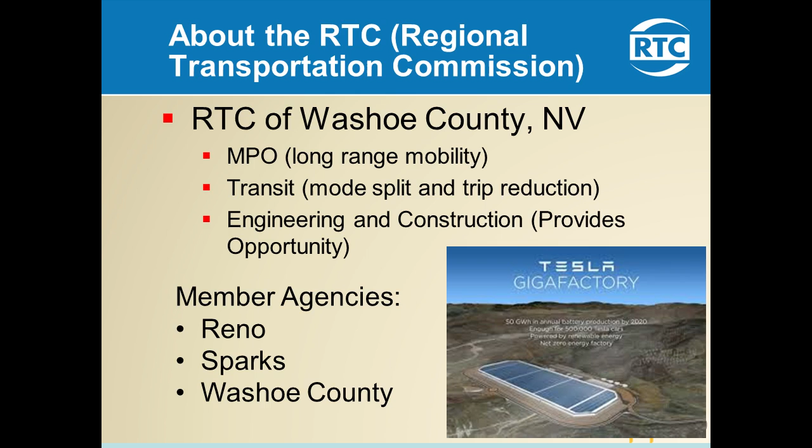We're also unusual, or were unusual. In 2002, our voters not once but twice voted by initiative to index our fuel tax to inflation to pay for road and pavement improvements. I'm happy to see that a lot of the states have finally broken down and their legislatures have also been passing fuel tax increases, because our federal friends, Congress, that's just such a non-starter to provide sufficient funding for our roadway improvements.

But for us it's kind of interesting. The first time we did it, we indexed it to the consumer price index, which was flat during the early 2000s while construction inflation was going through the roof. Most recently, we indexed it to the producer price index, which more closely parallels construction inflation, which keeps our funding levels adequate.

We not only index our local county fuel tax, we index the state tax, which hasn't been raised for 20 years or so, and we keep that chunk. We index the federal fuel tax, and we keep that, which hasn't been raised since 1993 and has about 30% of its buying power. We also index the federal diesel fuel tax for all the diesel sold in our county, which hasn't been raised since 1982, and is the reason we have to build roads 5 feet thick on our interstates. We keep that as well.

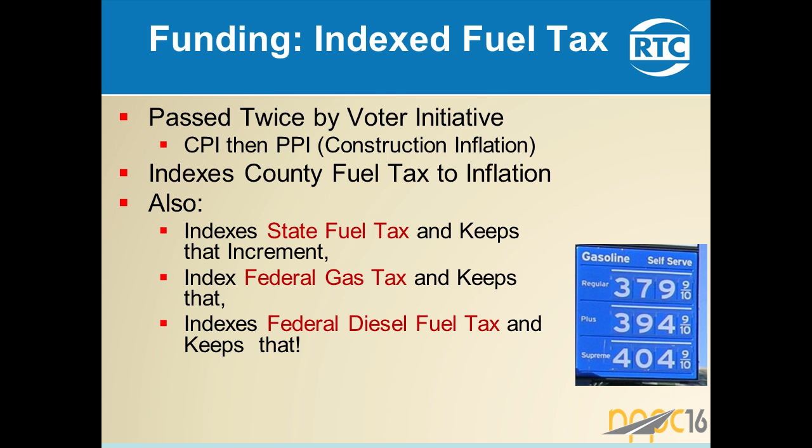So we're very fortunate in that we have a sufficient funding stream as well.

70% are local residential roads that each of our cities have, and they have a tax increment that takes care of that. When you look at the trips that occur, about 42% of the trips in our community are on those 2 interstates, about 50% are on our network, and about 8% of the trips are on those local roads. Although lots of people like to say every trip starts on a local road, so that's a concern for us as well.

On our pavement preservation program, when we developed this system, I'll also say I'm in a very fortunate position in that I don't own any of these roads. They all belong to the communities, and their maintenance departments are responsible for the regular conventional maintenance. So I don't really have any assets, but I manage this tax increment, we hire the consultants that reconstruct these roadways and oversee the construction in-house ourselves, and then turn them over to our local agencies.

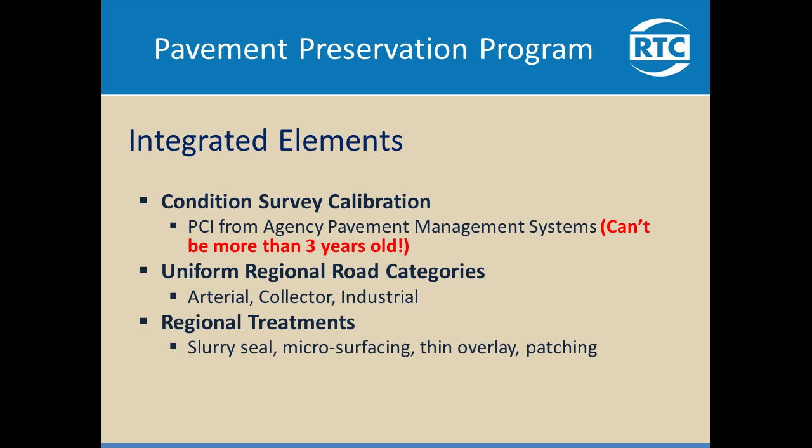We all had to come to an agreement on what the regional road categories were and what treatments each of our agencies were comfortable with having placed on their streets. Our tools were slurry seals and microsurfacing, thin overlays, and patching - pretty conventional stuff.

In terms of distributing and prioritizing what work happens, roads with a PCI less than 50 are eligible for rehabilitation and reconstruction, and then we rank those by ADT. Ones with the higher traffic get the first priority in terms of getting funded, and you keep going down that list until you run out of money.

If the first road was in the city of Reno and they had sewer work or something, that meant they couldn't do that road that year, and the next road was in the city of Sparks, the money would go to the city of Sparks, for example. So again, being blind to jurisdiction.

The title of this presentation was Decision Making Based on Data, and so I'm going to go through a lot of the data sources that we acquire here.

We rank the rehab at different levels, and then preventive maintenance - most of our roads, our network, is in good to very good condition, so we're kind of in preventive maintenance mode. To qualify for that, it's 56 to 100 PCI, and structural distress less than 5%.

Then we have a corrective category that's kind of a catch-all, because there's some lower ADT roads that may never be captured, so we set aside a certain percentage of funding for those, so we can get them in the package and fill in those gaps between the rehab reconstructs and the preventive maintenance stuff.

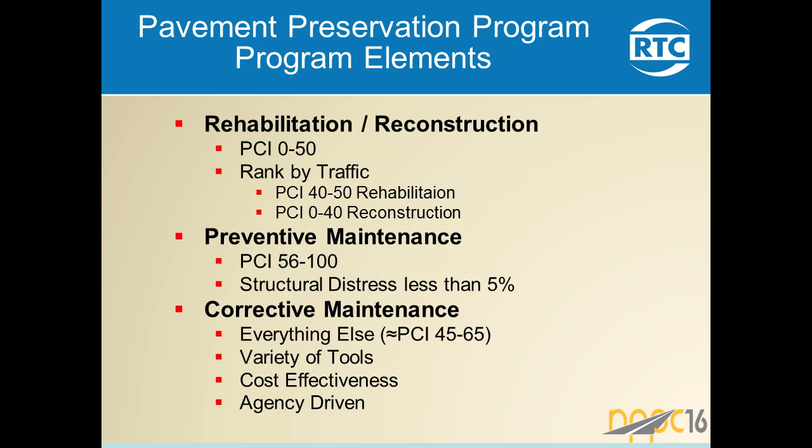In terms of decisions that need to be made, because we're the MPO, we have to have good data on the long range, from our long-range transportation plan, and we work with our planning agencies to figure out what our long-range growth needs are going to be, what kind of capacity improvements we're going to have, and then we look at our pavement infrastructure to see what our demands are going to be for funding needs in the future.

That's kind of how we came up with that, and it drove our success in passing those fuel tax initiatives, because our long-range needs were $4 to $5 billion over the 30-year planning horizon that we developed for our long-range transportation plan. Those costs come directly out of our pavement management system and how we do this stuff.

Our current program of projects, as I said, we use that to prioritize things. We also use this data for continuous improvements, looking at the performance of these things and figuring out how to do it better, faster, and more cost effectively.

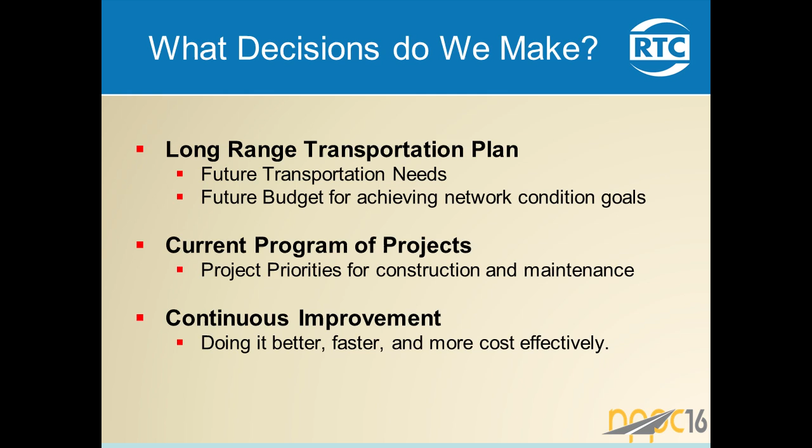In terms of data sources, we have a lot of old experienced engineers with a lot of institutional knowledge, and we take full advantage of them. We also have the pavement management data from the pavement management systems and PCI. And then we have an ongoing research contract, two of them actually, with our local university, the University of Nevada at Reno, which is home to the Western Regional Superpave Center.

We have a $150,000 biannual contract for pavement research. They also have a traffic engineering department, and we use them for getting data on managing capacity and traffic signal optimization and those types of things.

We also use national studies and participate in organizations like the National Pavement Preservation Partnerships and TRB, and try to implement that kind of data. And then we also do a lot of public outreach and use what our community feels.

We listen a lot to our community and take seriously their perceptions of what they want our community to look like long range as we grow.

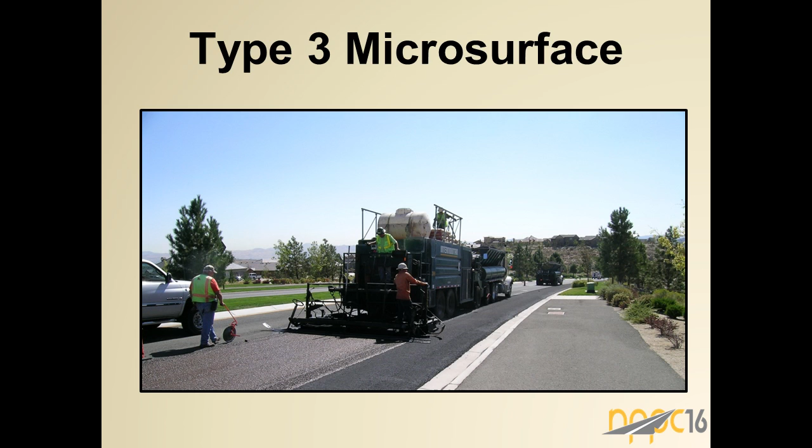This is a type 3 microsurface. This is kind of our workhorse in terms of maintenance—we do about 200 lane miles of this stuff a year. Again, we're kind of in preventive maintenance mode in terms of our pavement preservation tools.

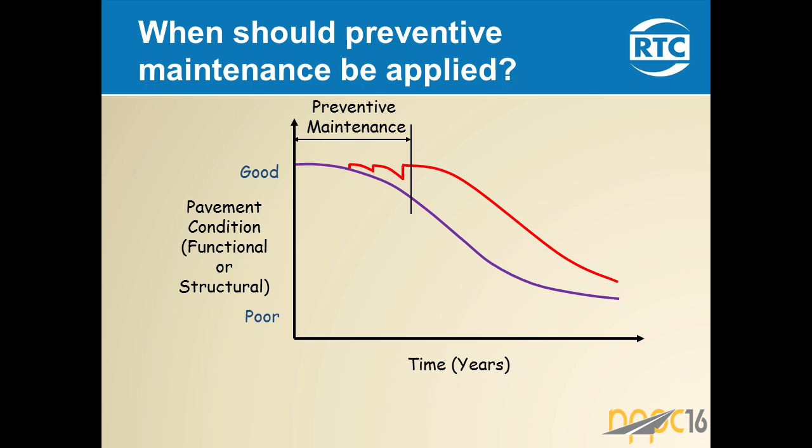Here's your basic pavement preservation curve, and the idea with preventive maintenance is that you do these small, inexpensive treatments, and that you push that red line out from the purple line. The whole idea behind all of these is to extend the pavement life overall of your network and your system. So that's what it looks like in theory.

Then he got very aggressive on doing pavement preservation, primarily chip seals, but also evaluating new materials and that kind of stuff. A guy named Doug Olson, who was with Intermountain Slurry Seal at the time, was always going, 'Hey, we've got this new stuff called microsurfacing,' and he'd go, 'Yeah, bring it on, we'll try it on this road over here.' So he was always very aggressive at implementing all of these things.

After that, we took over the maintenance of many of their roadways. And I'm going, 'You know, Greg, your curve is showing this road to be like a 50 and it's like an 80. Can you go back and check on that?' And he hadn't done this for 20 years.

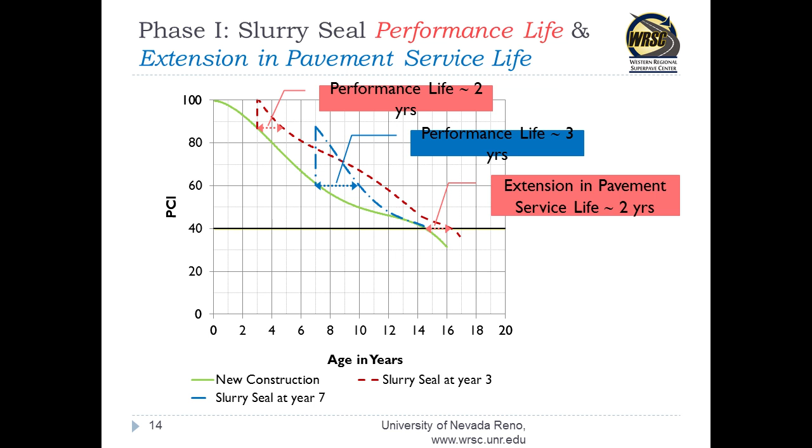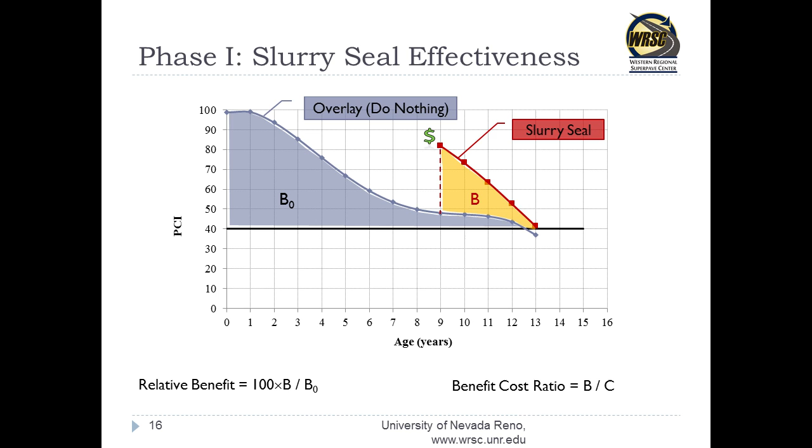One of the things in terms of slurry seal effectiveness is the area under the curve after you applied the slurry seal versus the area under the curve of how the road would perform initially. If you take those, there are different calculations you can make in terms of benefit and benefit-cost ratio. The benefit essentially is kind of the percentage.

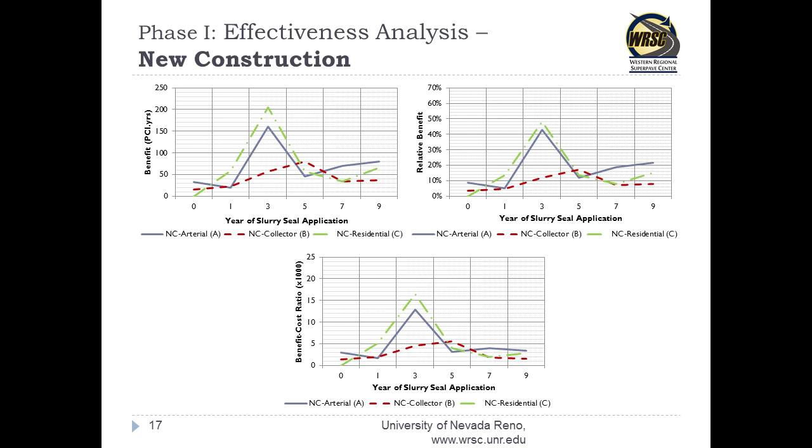One of the striking things we found, Dr. Peter Sebaaly said there might be some age hardening associated with it if you apply these treatments at a different time or wait. But there was this really striking spike in terms of benefit if you applied your first slurry seal at 3 years. The same effect happens for overlays, between 3 and 5 years.

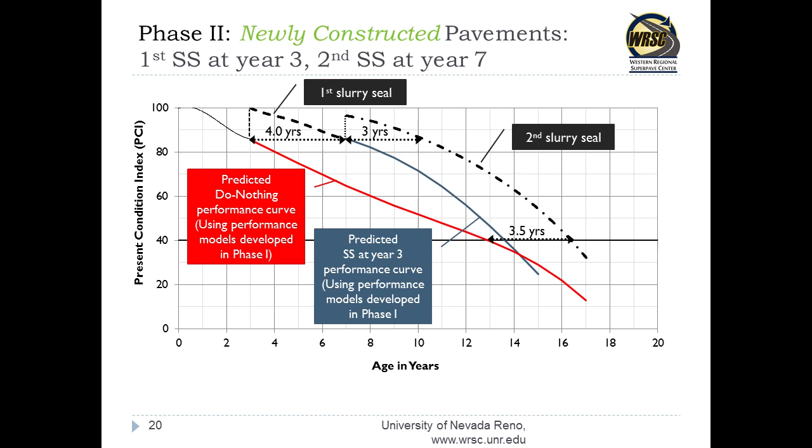So looking at this, we're just going, what is going on with these? What's the mechanism happening with these benefits? We looked into some additional benefit calculations, and then we started looking at second slurry seals. You put the first one on and it kind of peters out towards the end of the performance life at terminal serviceability. But when you place that second slurry seal, that's when you really start to see an increase in performance life overall.

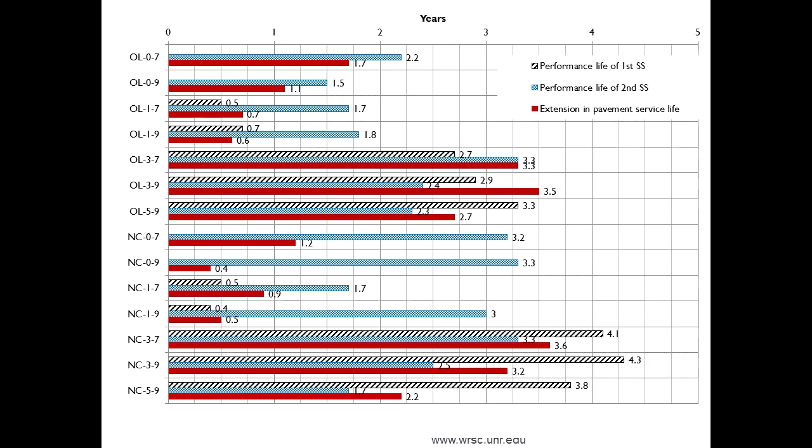Here's an example. The red lines are extension in pavement service life in terms of years. Here's how you model that in terms of what it really looks like on the ground — this is the additional benefit if you put your first slurry on at 3 years and then your second one on at 7 years, which turned out to be the optimum for us.

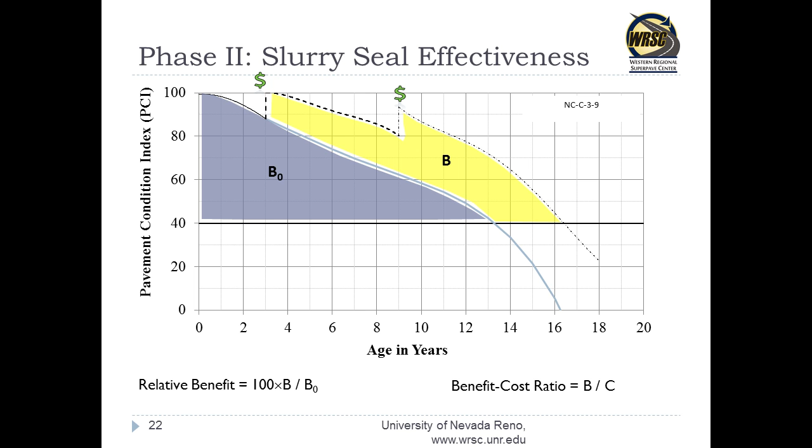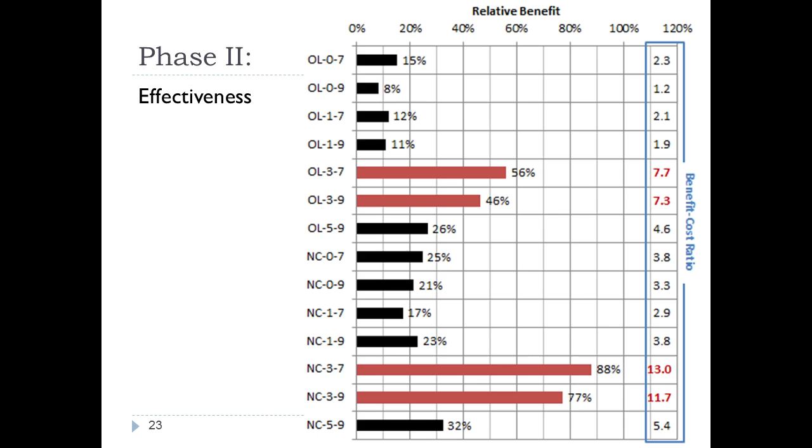You end up having these two down here in terms of benefit, which is like the percent increase in benefit overall — 88% and 77% at this particular timing.

So this is the way we model our network. We do our first slurry seal at 3 years, and then start our 7-year cycle every year after that in terms of doing our microsurfacings now.

Again, the mechanism — after thinking about why this works this way — there's an age hardening associated with putting an asphalt pavement out there. With asphalt, it's all about the aging. It actually gets stiffer and stronger, and you're getting a structural increase over that first 3 years. Then when you put that first surface treatment on, you're retarding the aging from that point on at a higher structural capacity level.

Anyhow, we've bought into this philosophy, and that's a decision we've made based on some of the research data we've got. Some other things we're looking at are the long-term performance of new technologies.

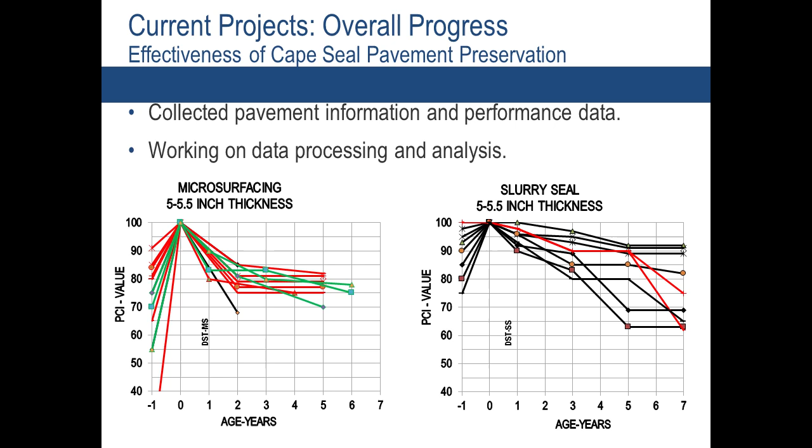One of them was Cape Seals. We've been comparing slurry seal, capped Cape Seals — which is a chip seal with a slurry seal on top — and microsurfacing caps, and we're seeing some stronger performance over time with a microsurfacing cap over the conventional slurry seal caps.

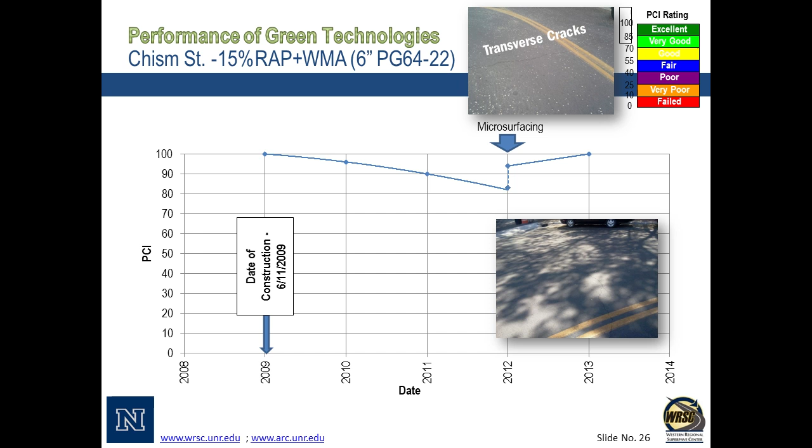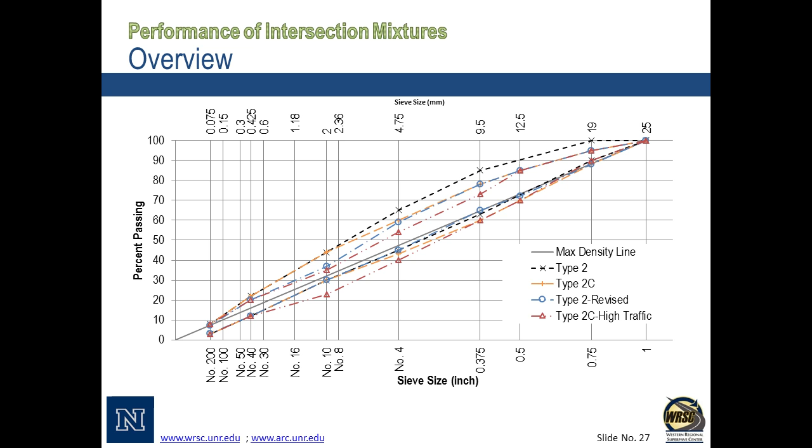Also some other research on intersection mixes, providing better stability at intersections where there's a lot of stopping movements, especially in areas with lots of commercial trucks and that kind of thing around malls, Walmarts and Kmarts.

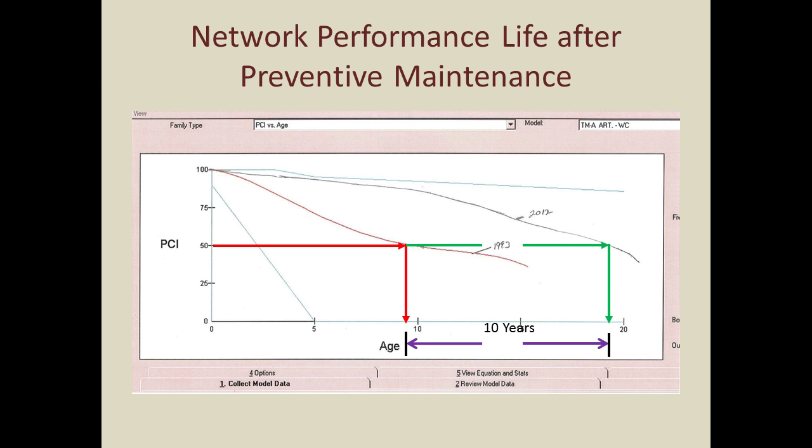So my goal right now is, this was how we improved performance over that first 20 years, but there's a lot of stuff reflected in this where we're continuing trying to push those curves out and get additional pavement life out of it. Now I want to switch gears a little bit into some of that public data that we use.

We got a new executive director, and I've been very proud of our pavement management system and program. He was a planner, and he was a transit guy. You say the words pavement infrastructure to him, and his eyes kind of roll back up in his head. Many of you probably experience that with decision makers in your communities. The first time I gave a presentation before our board, he looked up and down at our board members and said, 'My favorite subject, watching asphalt congeal.' So I needed to work on this guy a little bit.

I'm a cyclist, and so when I look at roads and our pavement network and the work that we do, I see opportunities for bike lanes and that type of thing. We've been adopting and promoting complete streets policies for many years, and because we're the MPO and we run the transit system, we're trying to do mode shift and get people on buses and out of cars, reducing the demand for more pavement and lane miles in the future. Organizationally, we have that philosophy, and it aligns with my personal preferences. So when you've got a champion in my position, when I see roads, I see opportunities for bike lanes.

And the other good part about it is that this is pavement preservation. I'm now getting to broaden the conversation—I was going to slurry seal this street anyhow. So it's almost gravy to have these dramatic improvements in safety and condition and community-improving features through our pavement preservation program.

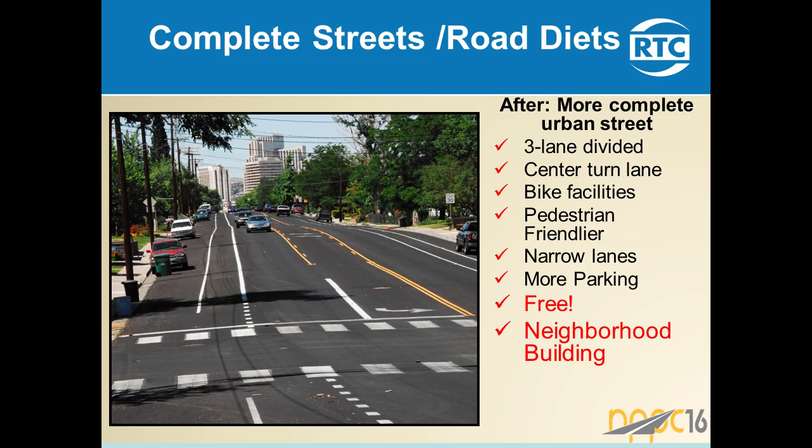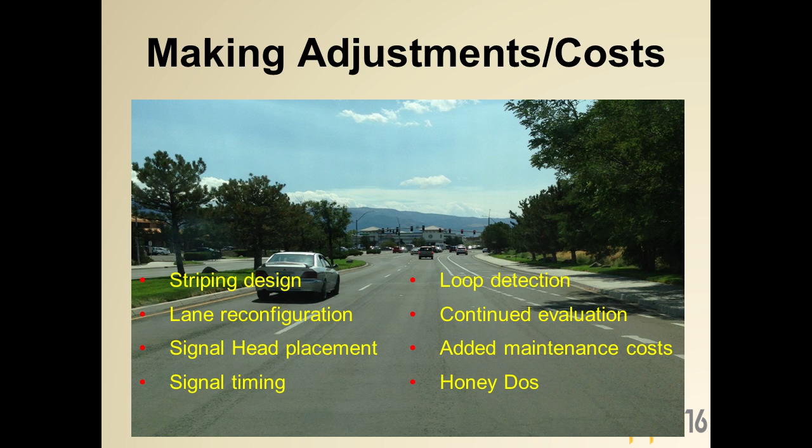When you do this stuff, we also just narrow lanes and add bike lanes in some cases. It takes some striping design. As part of our annual projects, we have some funding for doing striping design and engineering, and you've got to look at lane configurations, signal heads, and loop detection. We have a budget for the number of loops that we may need to adjust or realign so everything works okay. There's some added maintenance costs because there are more stripes out there, and our local agencies can act like you've cut their arms off because I've got to do more stripes now.

Tough—it's safer. So we started this project, and again, our executive director wanted to do it. There was some money called the TCSP grant, Transportation, Community and System Preservation Grant, and I'm thinking, man, that sounds like complete streets and pavement preservation. He was asking, so how are we going to get this money? And I said, well, somebody suggested this one corridor needed some transit facilities.

And I said, that's slated for a road diet. It's a candidate for a road diet in the future, and we were going to slurry seal that one anyhow. And he goes, well, okay, I like that idea, and we got it. So how are we going to do the match? I said, we can use the slurry seal as the match for this program. We applied for the grant, got $1 million, and used the pavement preservation slurry seal program we're doing anyhow as the match for the $1 million grant.

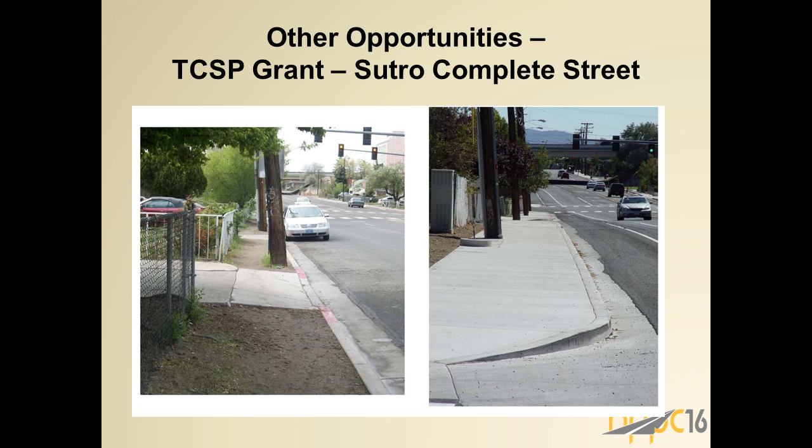This is what it ended up looking like before and after. We did all kinds of pedestrian improvements, widened the sidewalks, added transit facilities and bulb-outs, and there's our slurry seal preserving the pavement on that roadway. So if you leverage this stuff, you can get a lot of support for things.

Because our roadways are in such good condition, they took my pavement preservation money, which is $18 million a year, and said, can we defer that for 2 years? Well, they didn't really ask me. They said, we're taking your pavement preservation money for 2 years.

That's a Believe sculpture from Burning Man that we're also the gateway to. So anyhow, it provides - my pavement program is getting to be pretty popular amongst our planning folks these days.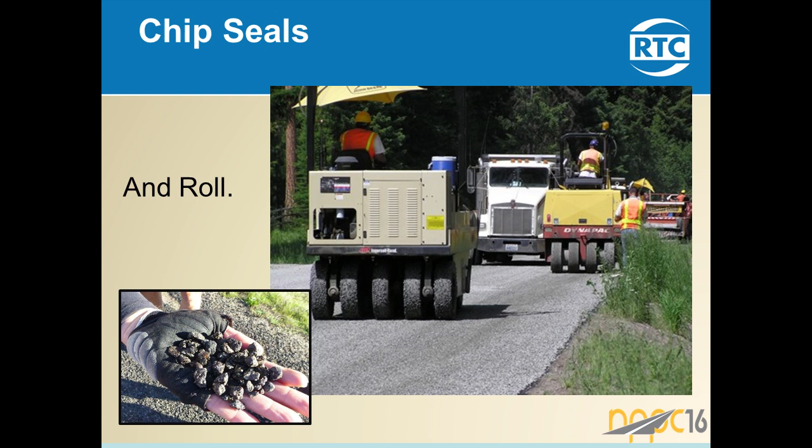One last thing in terms of data - I heard somebody from Billings, Montana talking about chip seals and roads. If you Google chip seals, you'll often come up with a bicycle-gloved hand, indicating these crazy people at the DOT have ruined my favorite bicycle route. But John Harvey at UC Davis, University of California - we've recently participated in a study for surface treatment, macro texture, and bicycle ride quality.

There's some studies out there. This one is for state level roads and highways, and there's a new one coming out in the next month or so that's more for urban communities - about what kind of gradations you can use for your surface treatments to come up with something accommodating to cyclists and road cyclists.

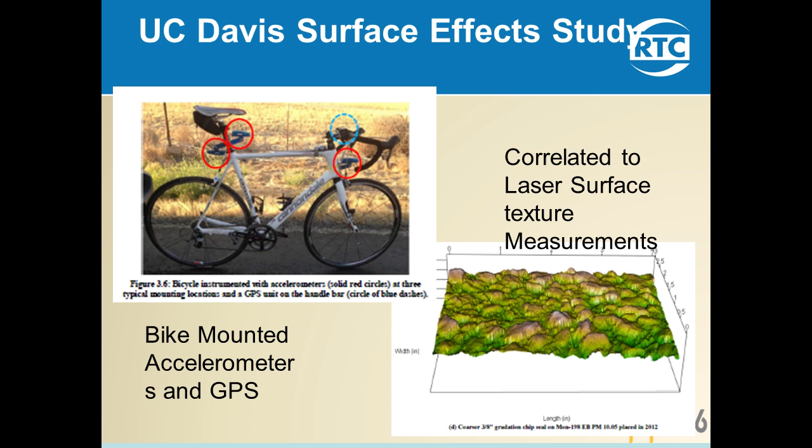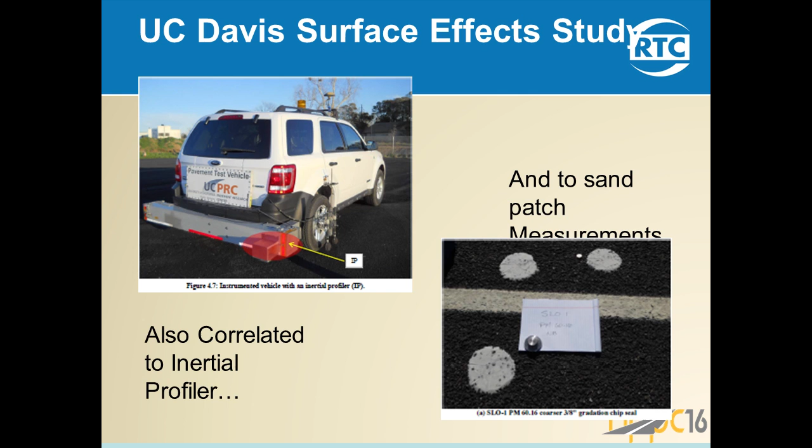They did this study and put accelerometers on bicycles, got a lot of data that way, correlated it to laser surface measurements and inertial profilometers, and then correlated that down to what size sand patch, along with surveys of cyclists, would be acceptable. For those of you with communities with lots of recreational riders you need to keep happy while also doing your pavement preservation program.

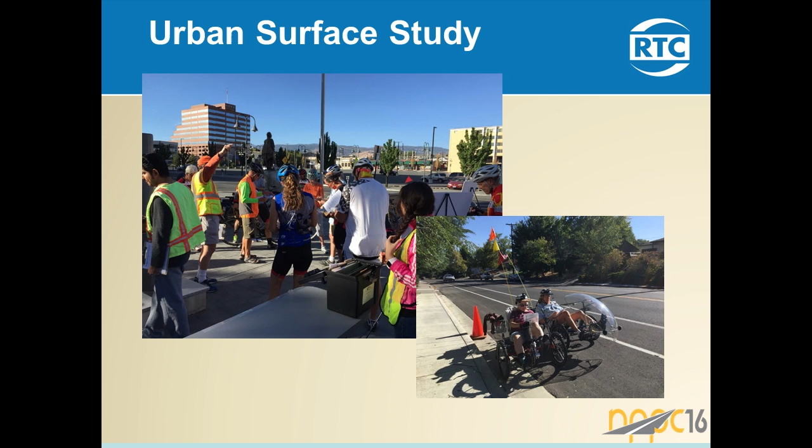This is part of our participation in our urban surface study. I'm told we saved their bacon because we had a lot of good gradation data on all of our surface treatments, and the other communities they studied didn't have as much information. So again, there's all kinds of data we use to make decisions on our pavement preservation that isn't necessarily related to pavement.

But it's critical to have that good quality information to make good decisions about improving things and be able to make your case in the long run. Make your pavement program part of a bigger conversation about safety and complete streets and better communities, and you'll get a lot more support from your community leaders and other decision makers.

And with that, questions?

Scott, one of the questions I had was, because you really don't own any of these roads, you asked for the PCI. Do you have a process in the approval where, let's say, you have some say, or do you need to approve the treatment, or do you go through that process?

We have a pavement preservation subcommittee made up of the public works folks from each of our agencies, and our board is made up of city council members and county commissioners from each local agency. They've actually approved that pavement preservation process, that prioritization process for how the money gets distributed, and it's signed by all the public works directors at one point in time. The money comes to us, so we're kind of the cash cow. That's a really good model for those of you in MPOs, because normally the MPO is just a pass-through.